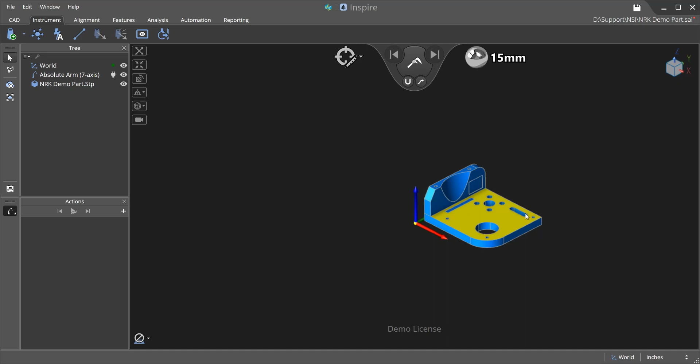Okay, so I've got my little demo part that I imported in. I'm using an arm, a hexagon arm, and then Inspire. And so to start with, I'm going to do a quick align, and then I'm just going to measure some points so that I can move the part, and then realign with the second instrument. In other words, jump the instrument to a new location. So let me just start off.

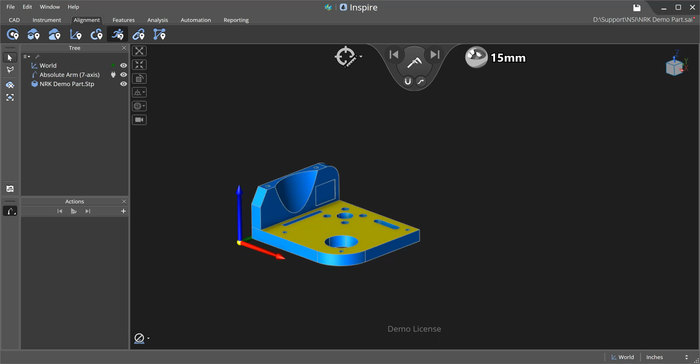To begin with, we'll just do a quick align to our CAD model. So I'll just click some places on the primary face that I want, and then we'll index, clock it, and then index it to the side. I think we're good with that. So let me just go ahead and take some points. This is not doing scanning, just probing. So I'll just take points approximately where I'm at.

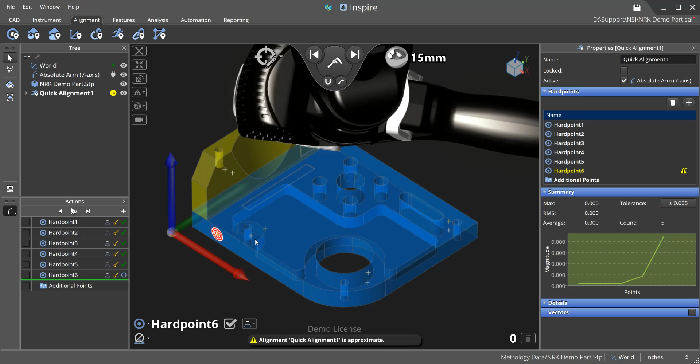And so once I have my alignment where I want it, I'm going to verify that I'm aligned to my CAD model. I could add additional points too, and it would try to fit to the CAD. But in this case, I'm going to say done. I want to take the instrument and just do a quick check to see that I'm on the part. So I'm just going to take the probe and scrub it along the surface.

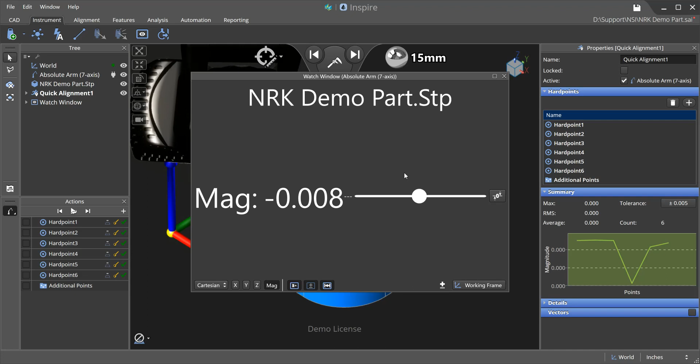And yes, I'm 4 thou, 9 thou. I think for my given setup, that's pretty decent. The part is just on the table, sitting on putty anyway. So we'll close that out. So next thing I'm going to do is go to features. I'm going to go ahead and measure some features that I want. I guess I should probably go ahead and do that.

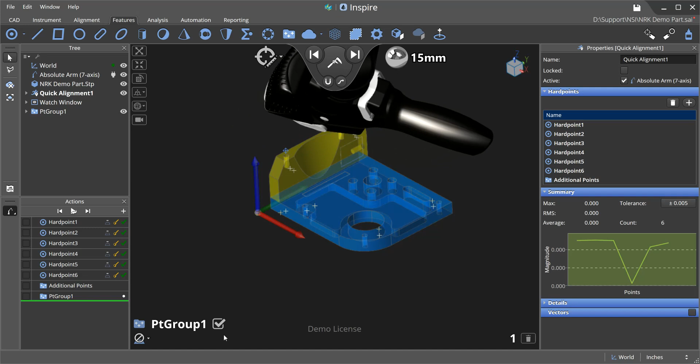So I'm going to measure some points as drift points first. So I'm just going to create a point group 1, and I've got some holes on the part that I can nest into. So let's just do 1, 2, 3, 4, 5, and I got a point on the side, 6. So I'm done with that.

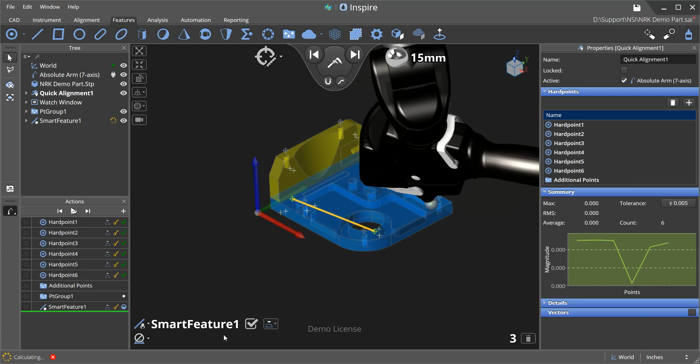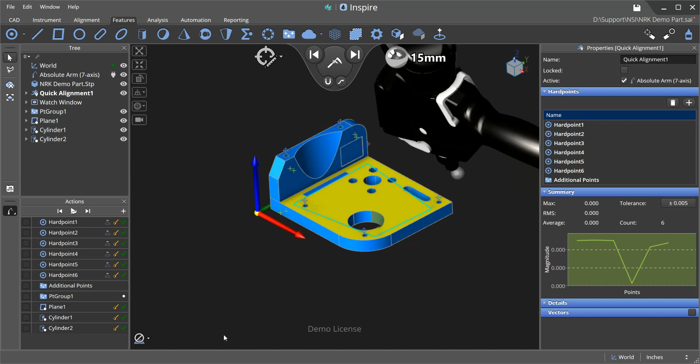So I'm just going to start measuring some features on my part. That, and that's going to be my projection plane. Do that. Circle. Move on, and I'll do this one. So I've got a couple of circles or cylinders that we've done. Oh, I turned off my projection planes, that's why.

So we've got that done. And if you do make a mistake, I really wanted those to be circles, but I turned off my projection planes. So if I come in here and simply tell it, no, you're really supposed to be a circle, I can do that. And then I can also say, yeah, I'm projecting onto that plane. And so now I've got that circle. And I could have done both of these at the same time. So we'll do the circle. Tell it there's that projection plane. So I have those features.

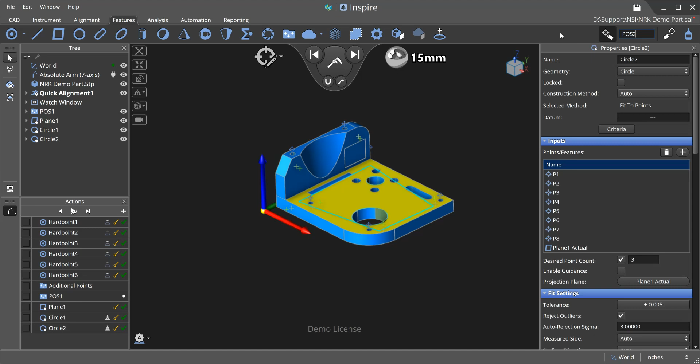So once I'm done measuring those, and I want to establish a second position, I can take this point group here if I want to rename it. Let's call this position 1. And so if I want to add a label in here, I can click this button, toggle the point name control. So if I call this position 2 in here and say, let's create another point group. Oh, it didn't do it. So that's

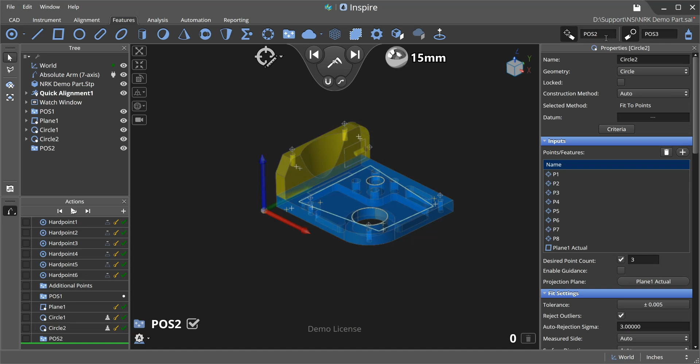control next feature name. That's what I wanted to do. So it's that one, position 2, and I'll do that feature group right there. So let's just delete that for now. So this is going to be a new point group, and you use this one, control next feature name. And so let's take a look at doing this.

So what I want to do now is move my part. So I'm actually going to physically flip my part around, as if I've taken the arm and moved it to the other side of my part. That's what I'm trying to replicate. I'm going to right click on the arm and say I want to jump. So now that I've jumped that arm, we can come in and I can start measuring into position 2 at this point.

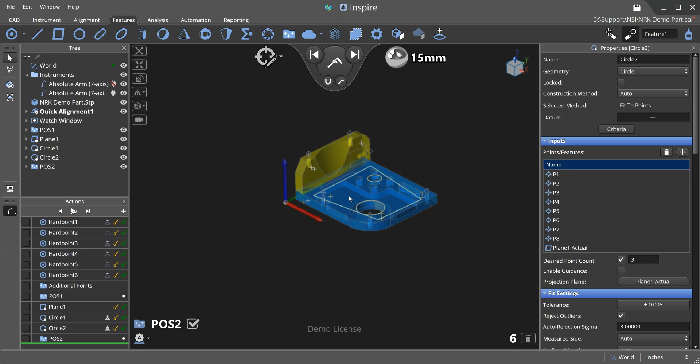Let me move it a good bit off so we can see where our points are. I can do this as an in-process align, but this is an easy way for me to keep up with what's going on. So I'm just going to measure point 1, 2, 3, 4, 5, 6. And they're not showing up on the screen because I'm moving my part away from the screen over to here with my new arm position. So I'm going to say I'm done.

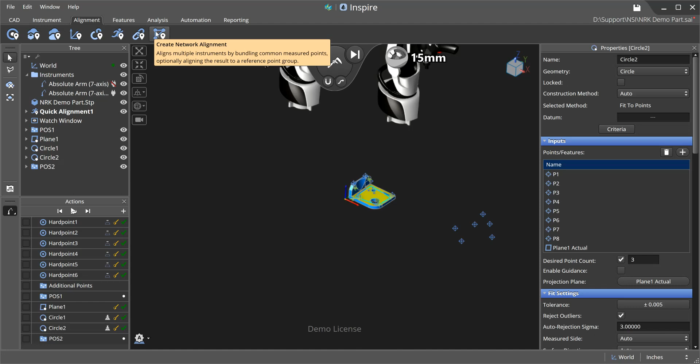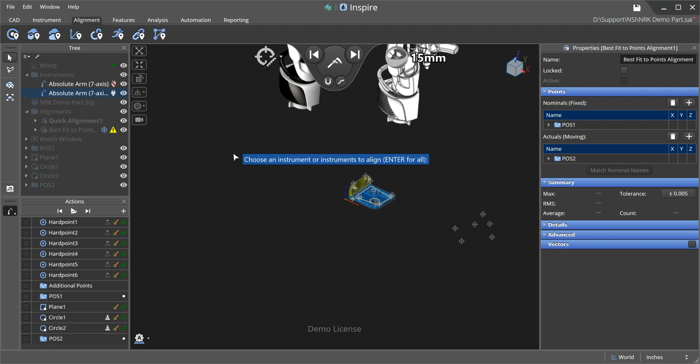And then for the alignment, just a simple matter, go to the alignment, do best fit, points to points. You can also do a network alignment as long as I'm sure I've named everything the same, which I think we're okay with. But I'm just going to do a best fit points to points. So by clicking this one, I'm going to say my best fit nominal points are going to be position 1. My best fit actuals are going to be position 2. It's going to ask me what instrument, so I'm going to pick the current live instrument that I added, and it's just going to snap it over into place.

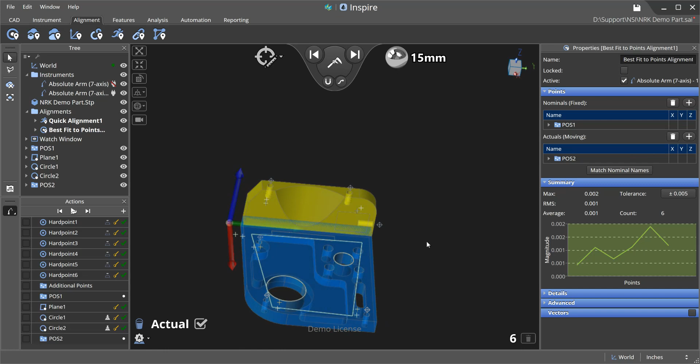And so now I can see how I have both the instruments around my part, graphically on the screen, looking physically like what I've done. Now I can continue measuring points here or on the back side, whatever I've given myself access to with that second position.